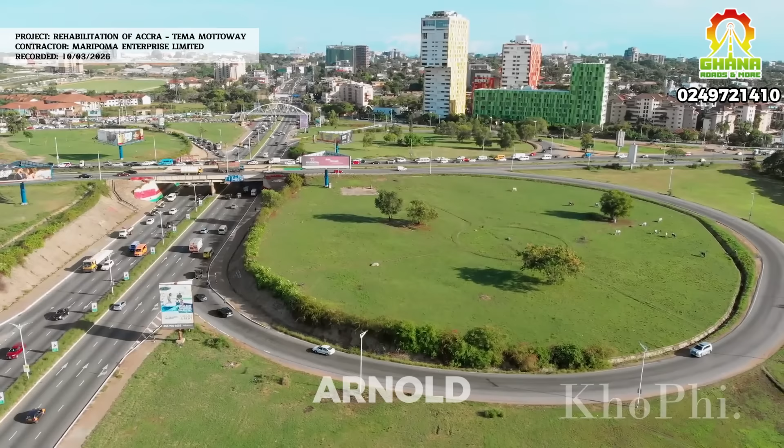Right, you get it? When you're from this side, Tema, and you want to go to Accra, you'd get round and come under where the diversion is happening. Now, I realize we're putting extra 2 or 3 lanes on the piers. Is it going to cut that exit? Do you get where I'm going?

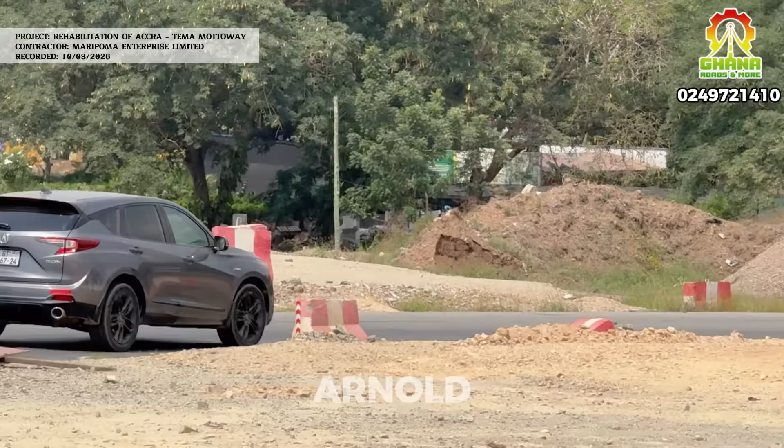What are you talking about? I'm talking of if you're from Tema and you want to get down to Accra, you descend, go around, and come under the underpass, then head towards the airport. You get it? If you're from Tema, going to Accra. As you approach Villaggio, you slide right and go under. You mean Tetteh Quarshie? Yes, Tetteh Quarshie Interchange.

So you slide and get onto the N4 and head to Accra. Now you are placing extra 3 lanes on the piers. Will it cut that sliding?

So what is going to happen in Tetteh Quarshie is that... God bless our homeland, Ghana. Bless our homeland, Ghana.

All right guys, we're back on the road. This is Ghana Roads and More, and we're reaching you from the Tetteh Quarshie Interchange. We're here for a very important mission, and the mission is to get a breakdown of what's happening here by Maripoma Enterprise Limited, and what you're supposed to know as a viewer or citizen at home observing what is happening here on the Accra-Tema Motorway construction.

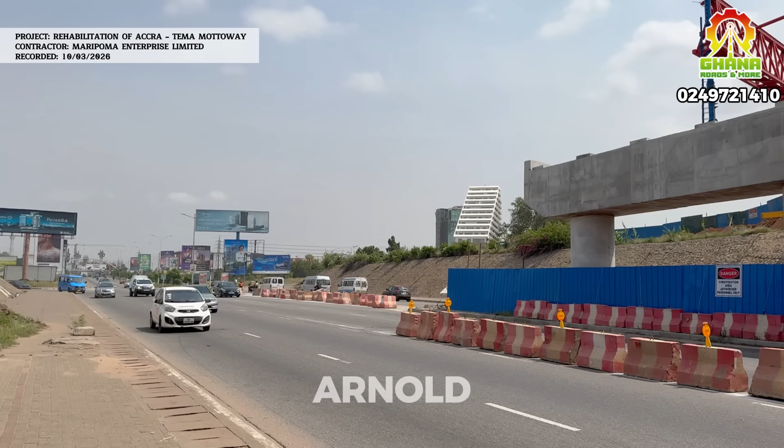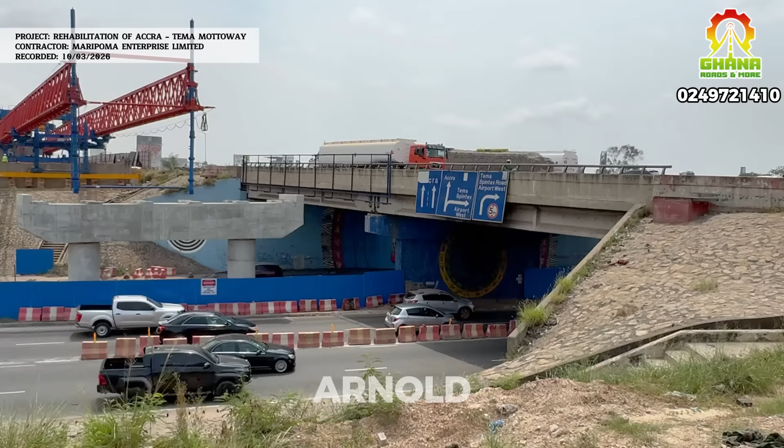A few days ago, we had a presser from Ghana Highways Authority stating clearly how traffic is going to be managed on the N4, which is from Medina all the way to Accra. So traffic is going to be managed on the N4. However, the road construction is happening on the Tema Motorway, from Tema to La Paz, but the traffic is going to be managed from Medina through to Accra. That's what you have to know first.

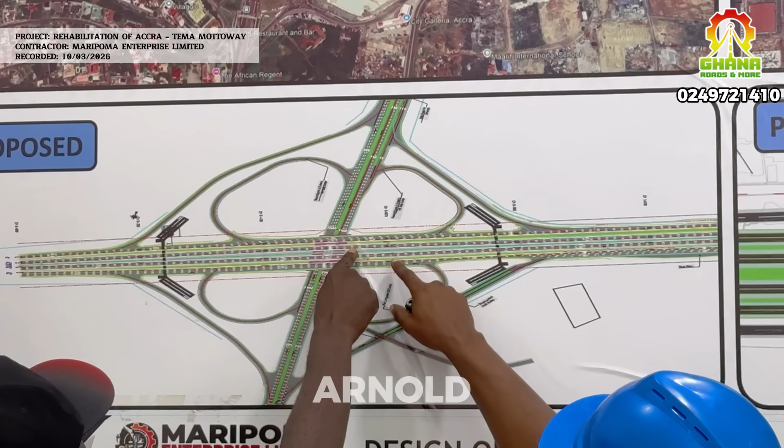Now secondly, why is this even necessary at this point in time? Maripoma Enterprise Limited, the contractor handling the Accra to Tema, or Tema to Tetteh Quarshie Motorway, is about to do an extension of the roads. So 3 lanes each are going to be added to each side. 3 lanes from Tema to La Paz, and 3 lanes from La Paz towards Tema.

So in all, we're going to have 6 lanes added, 3 for this side and 3 on the other side. In all, we're going to have between 10 and 12 lanes. Now I'm going to break it down: 10 lanes being the express and part of the urban highway, and one of the lanes is going to feed into the ramp, the cloverleaf design we have.

That goes from—so if you're coming from Tema and you're heading to Accra, when you get to Tetteh Quarshie, you will slide right, go around, and then hit the N4, use the underpass, and head towards the airport.

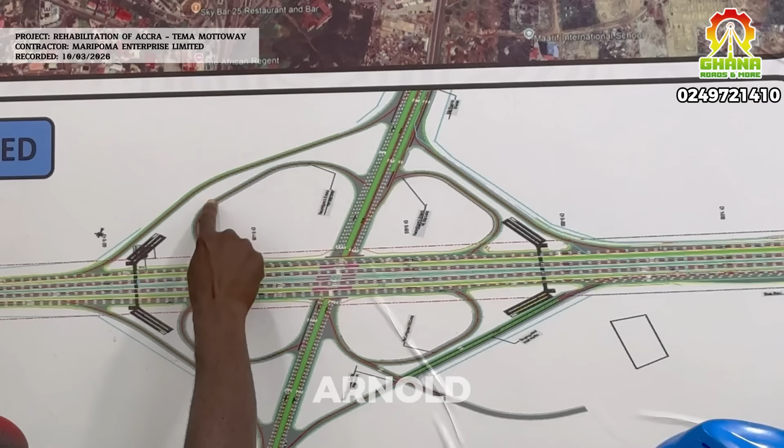If you're coming from La Paz and you want to, let's say you're coming from Medina and you want to get onto the Tema Motorway, same cloverleaf design. You head straight as if you're going to the airport, you slide right, use the side of Villaggio and connect to the motorway. So these designs are going to be maintained.

So out of the extra lanes that are being added, there's a remodeling that's going to cut one to give you the cloverleaf, and cut the other one to also give you the cloverleaf. And then the rest of the lanes are going to carry you straight towards La Paz, or straight from La Paz towards Tema. I guess this is clear enough.

We took it upon ourselves to visit the contractor at their offices, sit down, have a conversation, and get a proper breakdown and proper information with regards to what is happening here, so that we can all get it from the right people, feeding us the right information.

We sat down with engineer Ben Saki, the project manager for Maripoma Enterprise Limited. He is handling this project together with other top executives. It was a humbling moment hearing from this man, the creme de la creme. We're going to play that video for you to listen attentively as he tells you what is happening here.

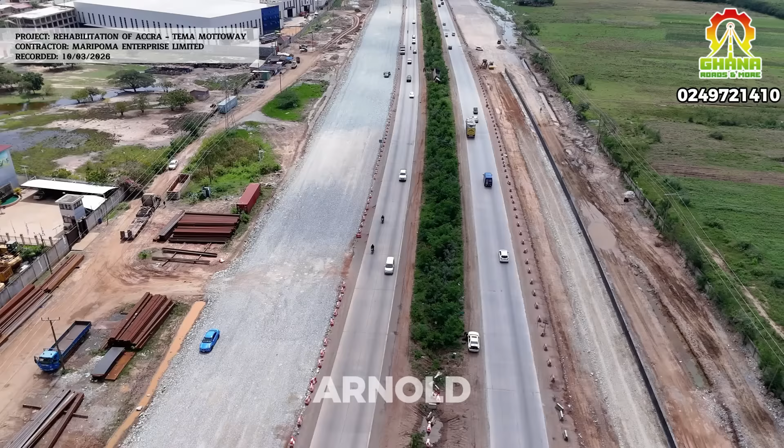The project entails the construction of 4 interchanges on the Accra Tema Motorway. The total length of the motorway construction project is 19.5 kilometers. It is done in phases. Section 1 begins from Tema roundabout to the Tetteh Quarshie Interchange.

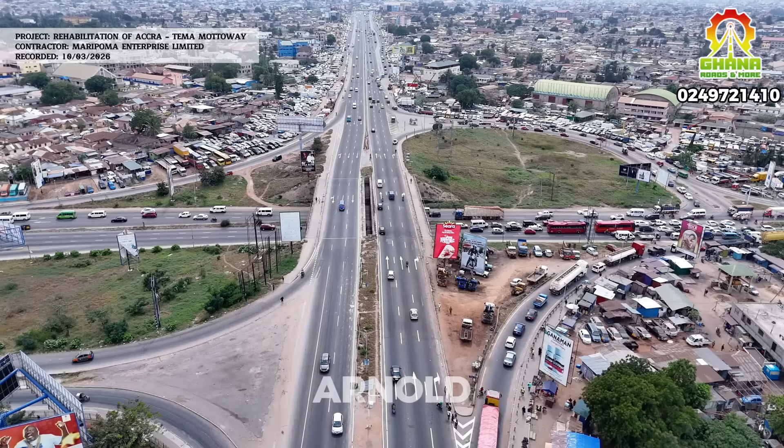Section 2 of the project takes you from Tetteh Quarshie to Apenkwan, past the Achimota roundabout and the first overhead bridge at Abofun, continuing beyond to the Apenkwan bridge.

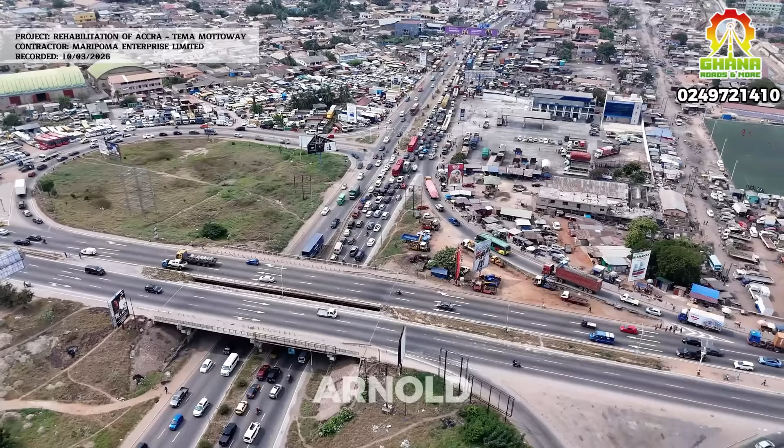That is section 2, which is about 5.7 kilometers. Section 3 of the project will take you from Apenkwan all the way to the Achimota new plan, which is about 2.7 kilometers.

But I don't want us to dwell too much on sections 2 and 3 because they're not part of the immediate contract we are handling now. The total scope extends all the way to that side, but currently what we are running as a contract is the 19.5 kilometers from Tetteh Quarshie to the motorway.

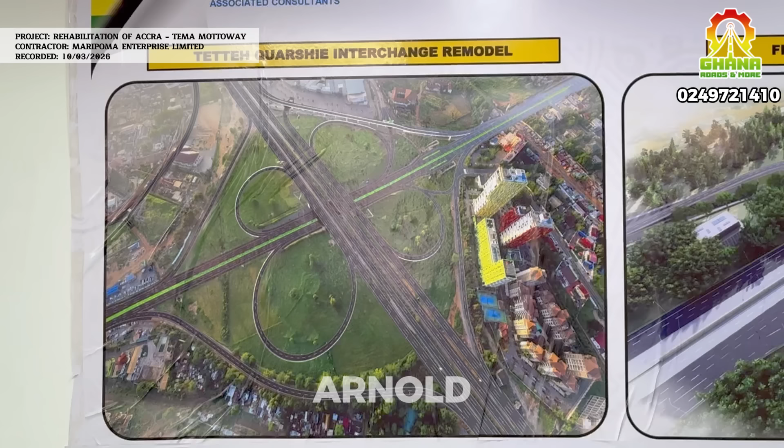How many extra lanes are we adding now, for which reason we had the diversion and blockade recently? Our design is that we are expanding the existing motorway, extending it to an additional 3 lanes on both sides. This means the total carriageway on the motorway is going to be 10 lanes, 5 on each side.

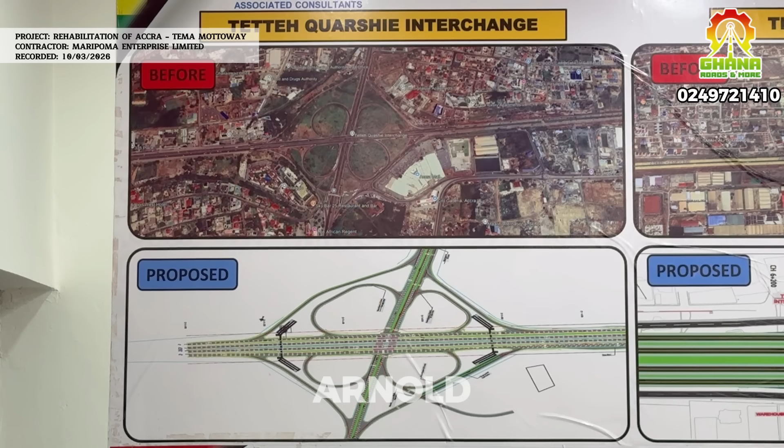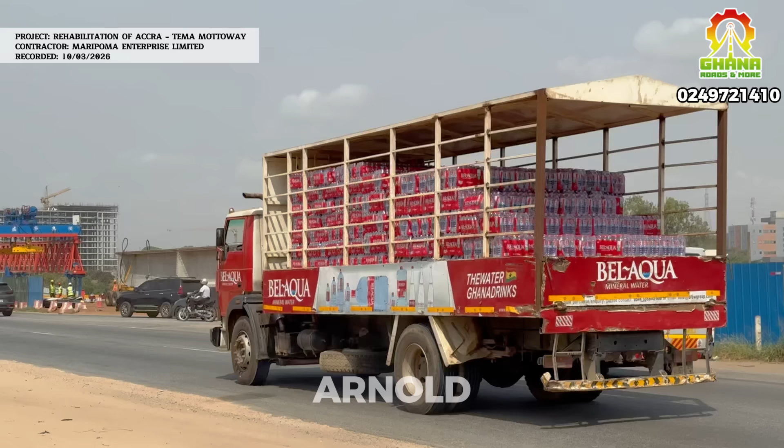So we are currently doing the other 3 lanes, which we normally call the urban highway. When we refer to the concrete road, we normally call it the expressway. So it's going to be a combination of expressway and urban highway.

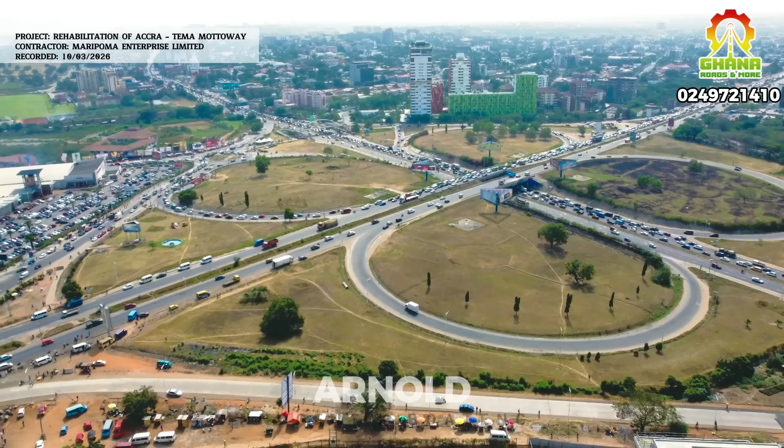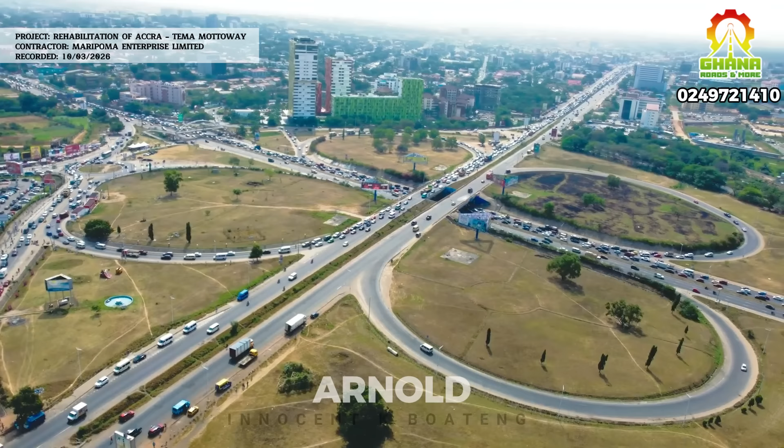So these 3 lanes, will it make 6, 3 on this side and 3 on the other? No, the existing concrete road is 2, then we're adding 3, so it will make 5 on one side and 5 on the other. But these are minimum lanes.

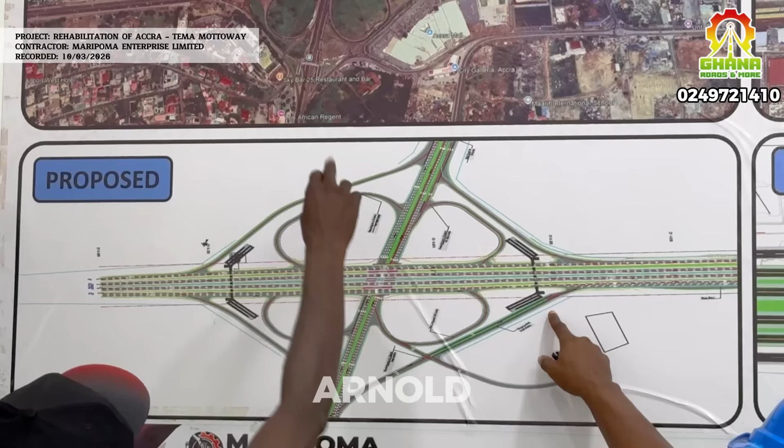By the time we finish, we'll have some ramps and accesses, so in some sections you will get more than 10, up to 11 or 12, because of additional accesses that will also be developed. But we don't consider that in the main construction count. We have 10 lanes.

So there are 2 sides I wanted clarity on. When you're coming from Tema and want to go to Accra, you would get round and come under where the diversion is happening. Now, I realize we're putting extra 2 or 3 lanes on the piers. Is it going to cut that exit? Do you get where I'm going?

If you're from Tema and you want to get to Accra, you descend, go around, come under the underpass, and head towards the airport. As you approach Villaggio, you slide right and go under Tetteh Quarshie Interchange, then get onto the N4 and head to Accra. Now, you are placing an extra 3 lanes on the piers.

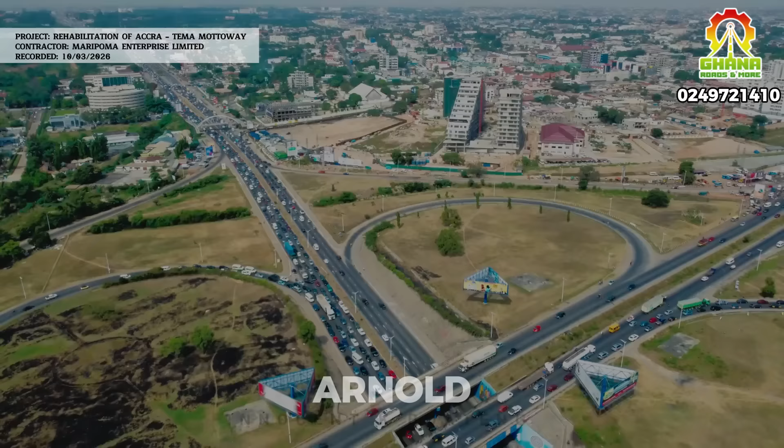Will it cut that sliding? So what is going to happen at Tetteh Quarshie is that the model you are seeing is going to be maintained finally. We are still going to have the clover leaf, the 4 loops of the interchange, the 4 ramps. It's going to still be maintained as 4 ramps. You understand?

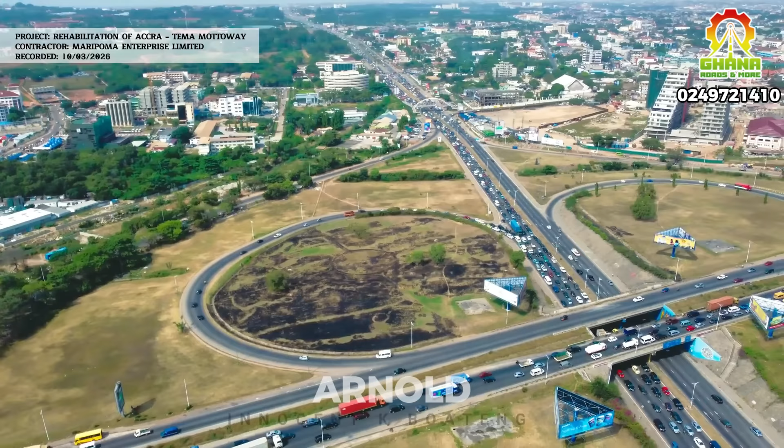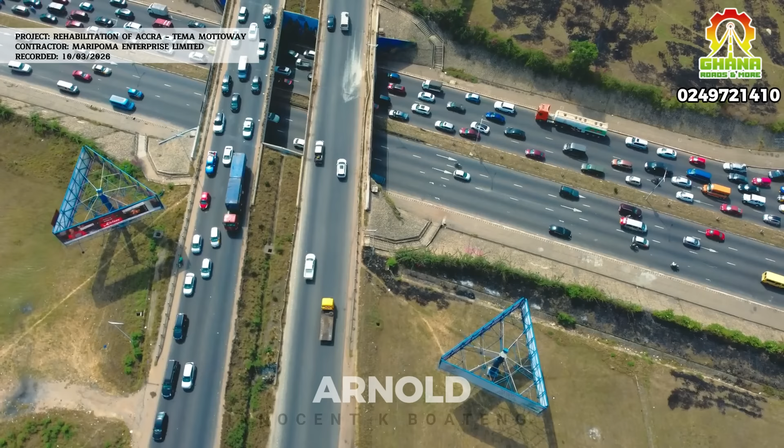Although we are coming with 10 lanes from the motorway, we need to carry the 10 lanes to cross Tetteh Quarshie. But as we speak, Tetteh Quarshie is having 3 lanes. It's 2 lanes, but when you add a ramp, it makes it like 3 lanes. You get it?

So we are going to add 3 lanes more to this. It means that we are still going to have finally 10 lanes, but 1 lane is acting as a ramp, the same ramp. So instead of having 5 lanes at Tetteh Quarshie, we are going to have 6 lanes.

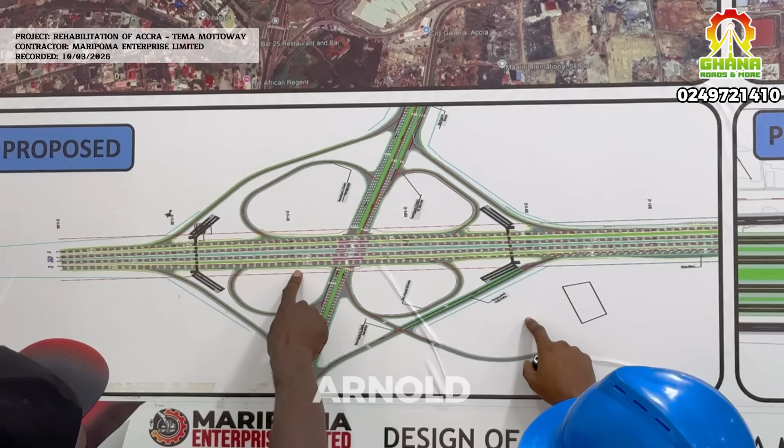And the last one, we are going to use it to create the ramp. So we are going to modify the existing ramp. After we construct the additional 3 lanes, we are going to redefine the loop, the ramp, to link. The last lane will be the ramp.

We'll get down there, and the same thing repeats on the other side, from Villaggio. The same thing. And then from the Accra Mall side. So all those 4 ramps will still be maintained. We are going to redefine it, remodel it, and reconstruct the loop to still function as the Tetteh Quarshie we know, with all the expansions, with the 10 lanes going through.

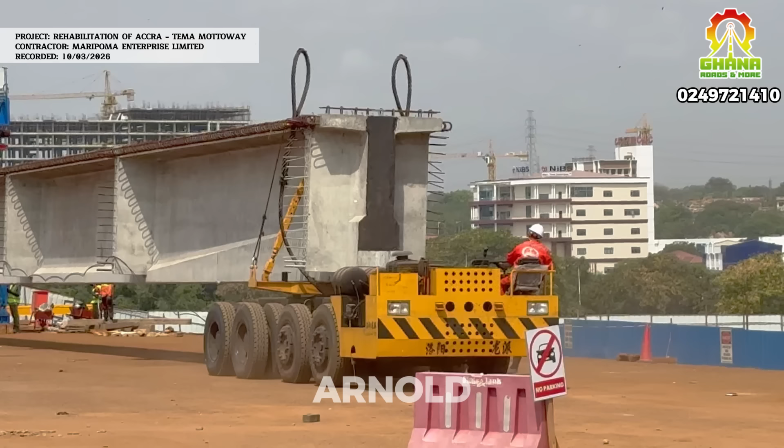It's the 10 lanes that we are coming with. And that's the reason why when we finish section 1, there is a need to continue with section 2.

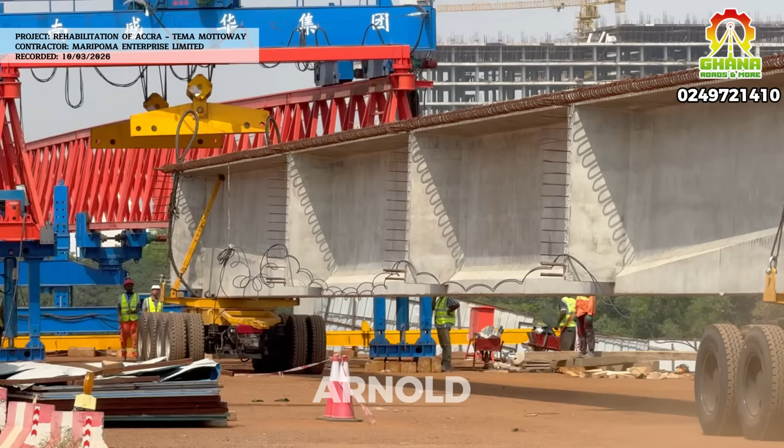Because we have now pushed the traffic into 10 lanes, and then from the Fiesta Royal going downstairs, it's 6 lanes. So it has to be remodified, reconstructed again to accommodate what is coming from here.

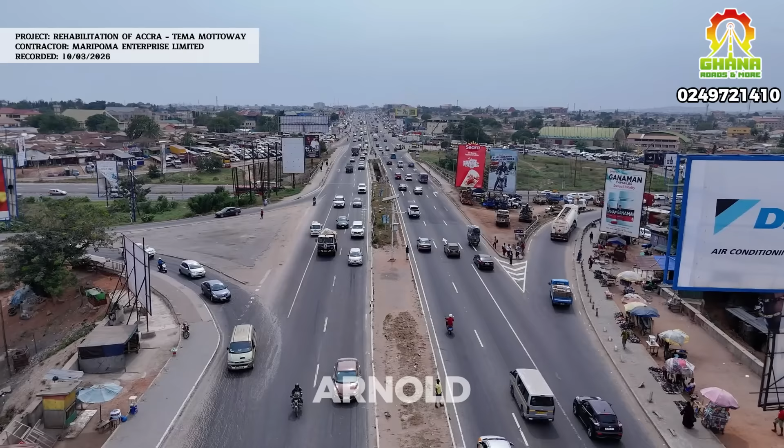Then when we get to the Apenkwa interchange, you understand, the same thing. We are not continuing from Apenkwa to Lapaz because at Apenkwa, there's a traffic distribution.

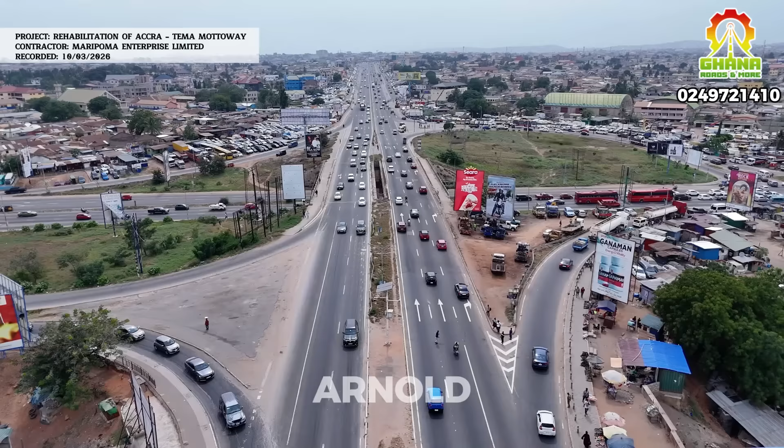All the traffic, you have one that can take you to Achimota. You have one that is taking you to Awoshie and the rest. You have the one that is taking you to Tesano. So the volume of traffic that you are bringing from the motorway, when we get to Apenkwa, it has to be distributed.

So there's no need again for you to say you want to expand from Apenkwa to Lapaz. All these were from traffic simulation, traffic data collection, which through the design gave us all these details, and we know that the volume we were carrying, when we get to Apenkwa, it's distributed. Then it continues from there towards Achimota Road.

So we realize that from our traffic data and the volume we analyzed, most of the trucks or most of the heavy equipment...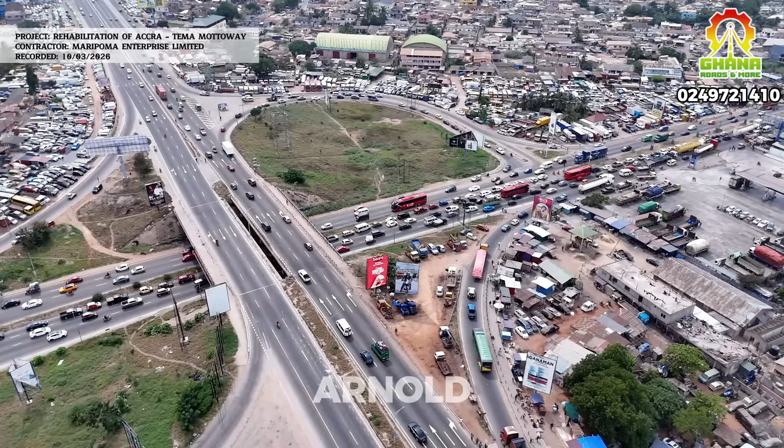That move from Tema, normally they don't go through La Paz. They go through Achimota, the N6, then to Ofankor, Nsawam, Ofankor, and the rest. You understand? So beautiful.

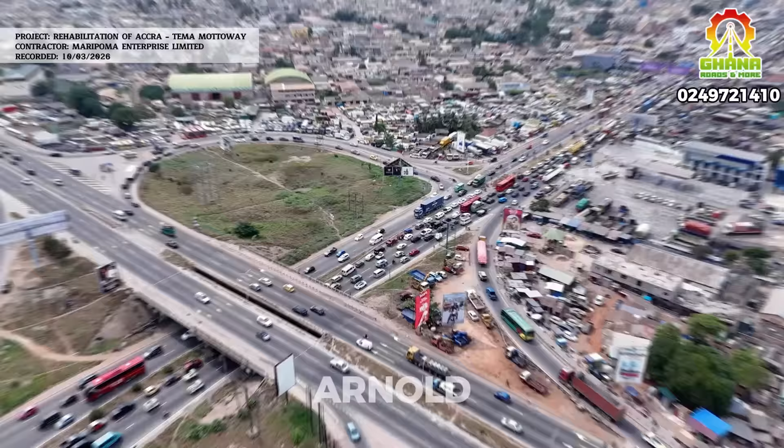There's the need to work on that section of the corridor to ensure that the volume and heavy traffic we were bringing, once most of them divert to this side, we have to redesign that one to meet the Ofankor Nsawam road as well.

Okay, not to take much of your time, just a bit of clarification. So these 4 months, according to the press release that was put out by Ghana Highways, is going to take like 3 to 4 months for what is happening now. Are we going to see the ramping and everything else you've mentioned here within these 4 months?

No. Within the 4 months, we were requesting from Ghana Highways to complete the bridge, the three extended bridges. We are going to launch the top. We have done the piers already, so now we are going to launch the deck on top.

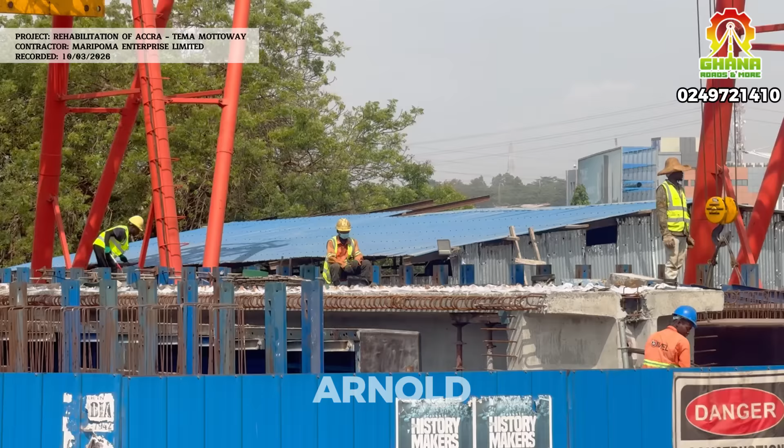On all the four corners, we need to launch the deck on top to make it a continuous route, a continuous traffic. But the 4 months, that's the only activity that is going to happen within that 4 months.

Because when we do that, we have to do road, we have to do the earthwork, we have to do the pavement. All this activity is not part of the 4 months. Only the launching is the 4 months. You don't need to divert the traffic for that, it's only the launching.

I just picked intel that the diversion has been ceased. Is it from your end or from Ghana Highways Authority? For now, we ceased the diversion yesterday. In fact, it was yesterday we opened it, and the same yesterday we closed it.

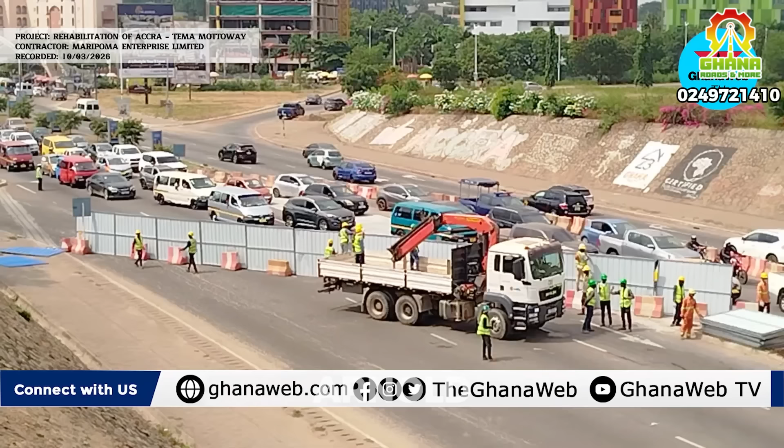Our traffic simulation, in creating the diversion, and the practical aspect of it did not match. What we expected for the traffic volume was not what we achieved. We realized it is more than that, overwhelming. The traffic extends all the way to Malam and all that, even to Accra, to Madina, Adenta.

We did not estimate that turnout. And also, the traffic we opened yesterday, it was a model. We blocked the traffic, but we didn't work, we didn't do any activity there yesterday. We did that for a model, we wanted to see how it would turn.

How what we simulated on paper is what is going to happen in reality on the ground. And then we sit back and observe whether we can sustain this traffic volume when we do something like this. So that is what happened yesterday. When the thing was overwhelming, we had to stop it.

Right now, we are planning to come up with an alternative work solution that will not have much impact on the public, as well as the contractors. Although it is going to cause us a little bit of delay, because we should have done some work, and now we have gone back to open the traffic again.

We are doing that because of the interest of the public. The safety and the interest of the public first. If we block traffic like this for the next 4 months, even one day we could see that we were feeling the impact.

Right now, what we are thinking is, instead of blocking for the whole period, maybe we could do intermittent work. If it requires maybe 4 hours or something, we can quickly do it and then reinstate traffic. We don't need to dedicate all the lanes for our work alone. So that could be part of the solutions we'll be considering.

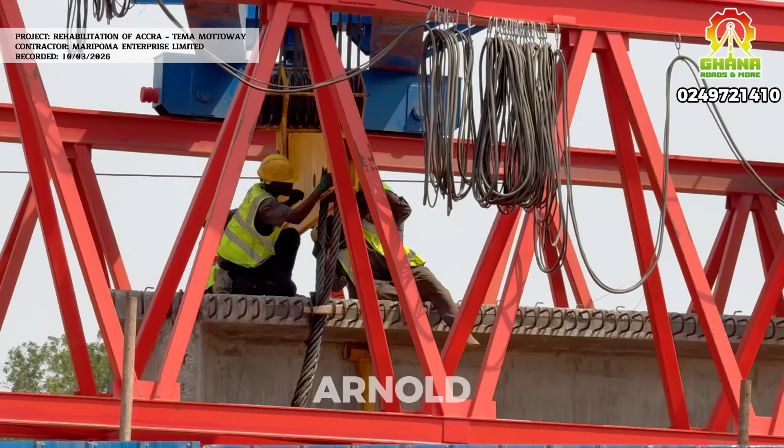The equipment that's going to be used to lift the T-beams onto the piers is what you're seeing right now. That launcher is showing you heavy equipment, heavy machinery that's going to carry the already precasted T-beams to be laid on the piers.

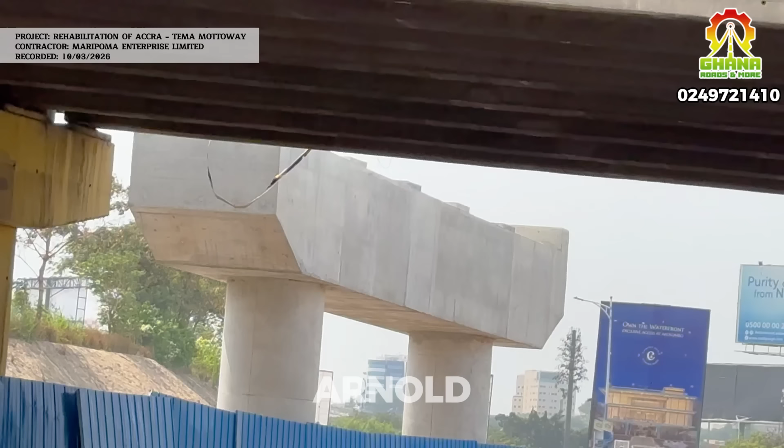So we have one pier here, and then we have another one on the other side. If you're driving on the N4, just under the overpass, you will see one standing on this side and the other one standing on the other side of the road. So two of the piers downstairs are going to feed onto this one I'm standing by here.

So the extra lanes, which is going to be 3-3, are going to be placed on these piers. And what is going to be placed on the piers is called the T-beam. These are technical words that we've all learned from the engineers. So the T-beams are going to be placed on the piers to give us the extra 3 lanes that we're looking at.

At the end of the day, the Tema Motorway heading towards Lapaz is going to have at least 10 lanes, and then an extra one for the ramps. I hope this is clear as well.

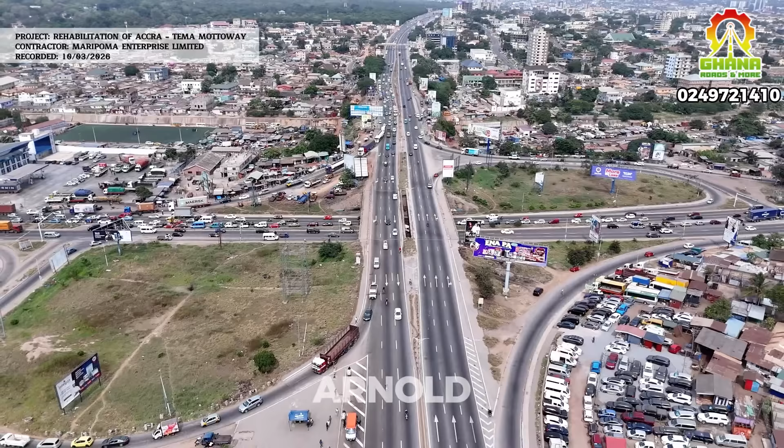Now, this project is broken down into 3 phases. The first phase is ending here, from Tema to Tetteh Quarshie roundabout. Then the second phase continues from Tetteh Quarshie to Apenkwa, which is after the Abofu footbridge, the Achimota overhead.

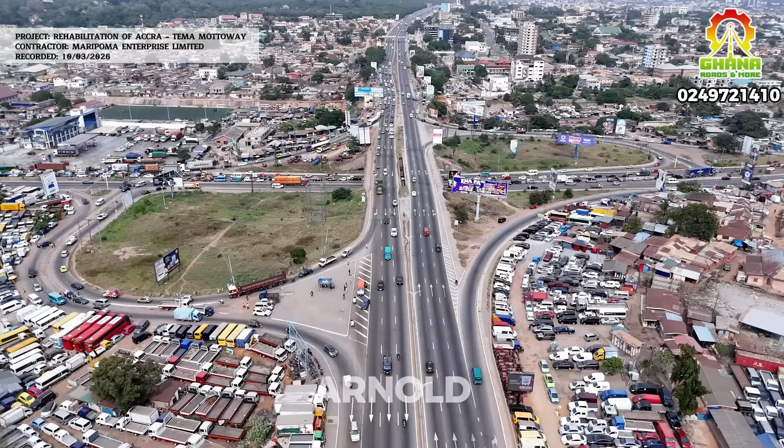That is where the second phase is ending, where you have those going to Tesano going around using the underpass to head to Tesano, and those coming from Achimota who want to get onto the N1 also go around and hit the N1. That is where it's going to end.

And then the third phase is going to start from there to Neoplan. So it is not continuing to Lapaz. It is going to veer off and hit the Achimota road. In fact, it is actually going to connect to the Ofankor road.

At the end of the day, that's the whole idea, to distribute traffic in a way that we do not have congestion in the city capital, especially around the interchange and around the Apenkwa interchange as well.

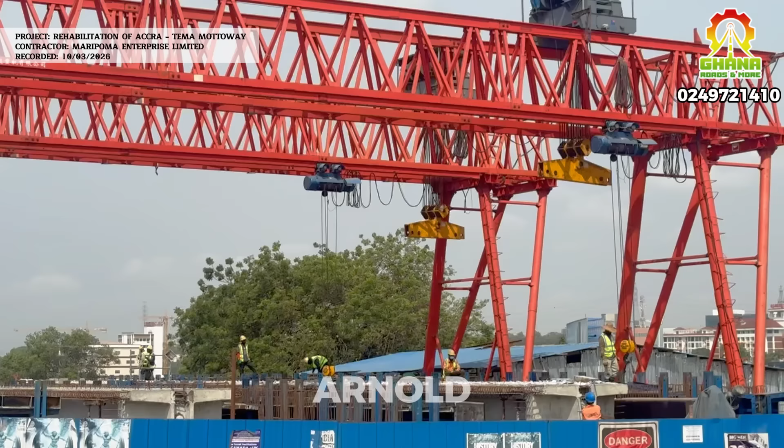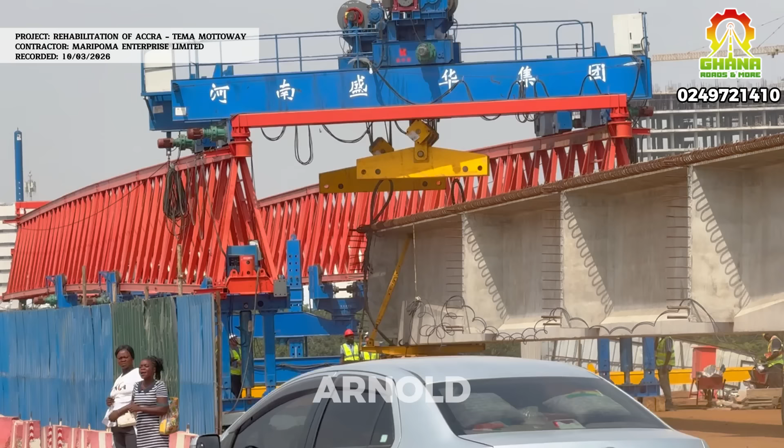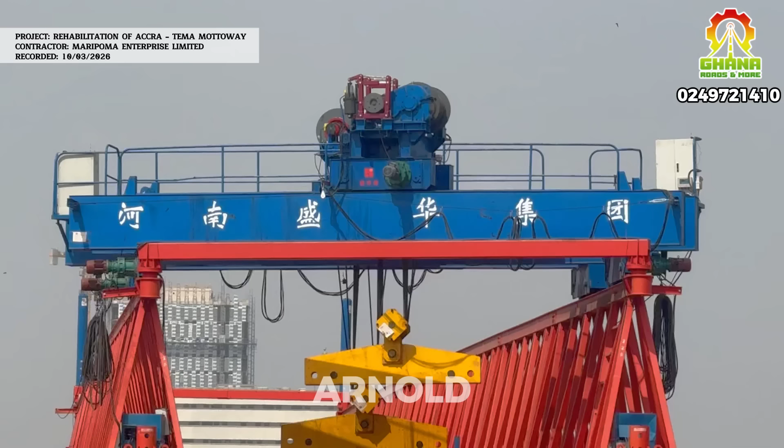God bless our homeland, Ghana. Make our nation great and strong, bold to defend forever the cause of freedom and of our rights. God bless our homeland, Ghana.